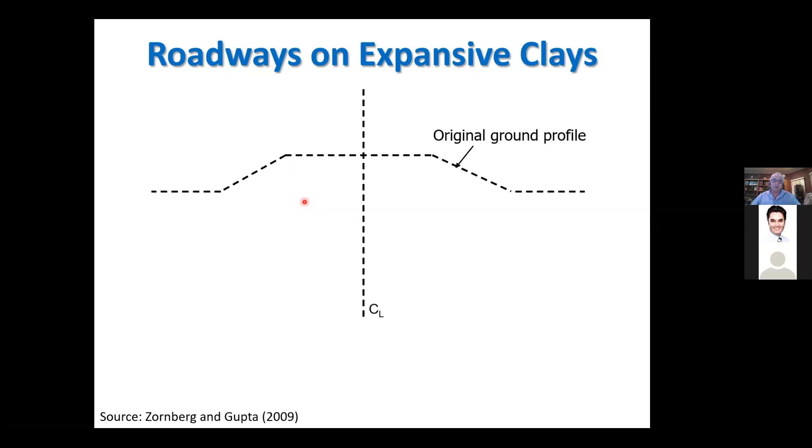Let's say we have a road founded on expansive clays. It turns out that expansive clays swell and shrink in response to changes in moisture. When the moisture content is high, the clay will swell; when low, the clay will shrink. The shoulders of the road change moisture very quickly or very often, while the center line of the road will not. Consequently, the shoulders will heave and settle, heave and settle. As a consequence, mainly during the dry season, at the end of the dry season, we start seeing something like this.

Very well-defined longitudinal cracks along the road. If you see this type of distress in the road, don't blame the traffic. If you see this type of distress, you can start thinking that potentially you, or the road, is sitting on expansive clays, and it can get really bad.

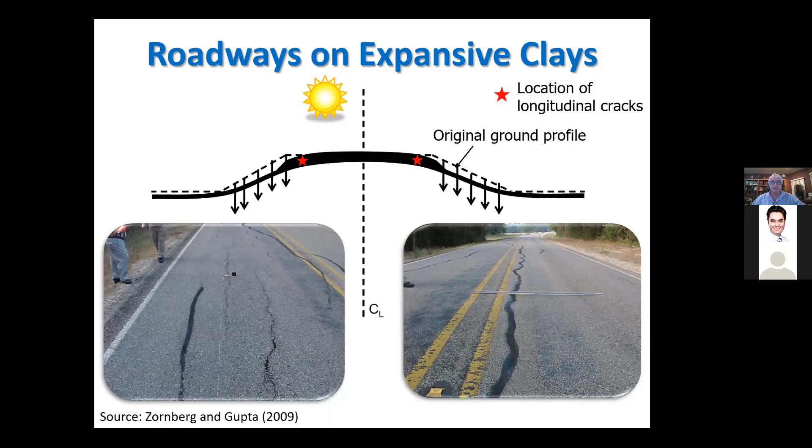This is a road nearby Austin, Texas, where I live. Sometimes we have this problem depending on the weather conditions, but sometimes we have this problem soon after opening the road to traffic. These are other examples in Central Texas - in this case in Austin, and in San Antonio, where we call them the Badlands. So this is definitely bad for roadways, and it's something that honestly we do not design for.

We design roads for traffic. We do not design these roads for environmental load. And this is not an exception - this is a very, very relevant problem. Let me show you some numbers. What you have here is some data only from the US.

We can consider that expansive clays and problems associated with them are some form of natural disaster, in the sense that they are caused by weather, typically extreme weather conditions. On a yearly basis, the cost associated with expansive clays exceeds 15 billion dollars per year. As a reference, here we have Andrew, Northridge - some of these, as a whole, the costs, and this comes from actual data from insurance companies. The financial costs associated with expansive clays far exceed the combined costs in the US of all other natural disasters. It is true that expansive clays are not life-threatening, but when we're talking about financial losses, these are actually huge.

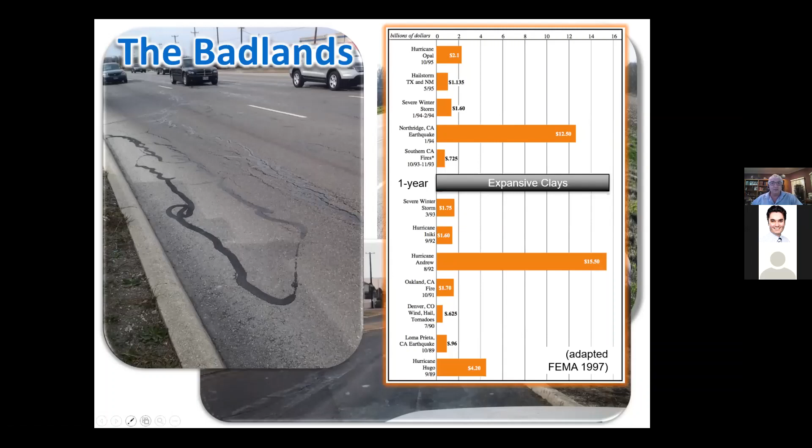Here we have where the problem associated with expansive clays is located geographically. Here in blue in the United States, central US, we have locations where there is a significant portion of expansive clays. And here in red are the locations where, okay, this is really bad stuff. Do not plan on building your cities in these red areas.

But that's not what we did in Texas. Let me show you Texas in detail. Here is what is called the Eagle Ford Formation, this red line here, and this is probably the most important north-south highway in the state. Here's Dallas-Fort Worth, this is Austin, Texas where I live, and this is San Antonio. 4 out of the 5 most populous cities in the state are exactly where we should have not built our cities.

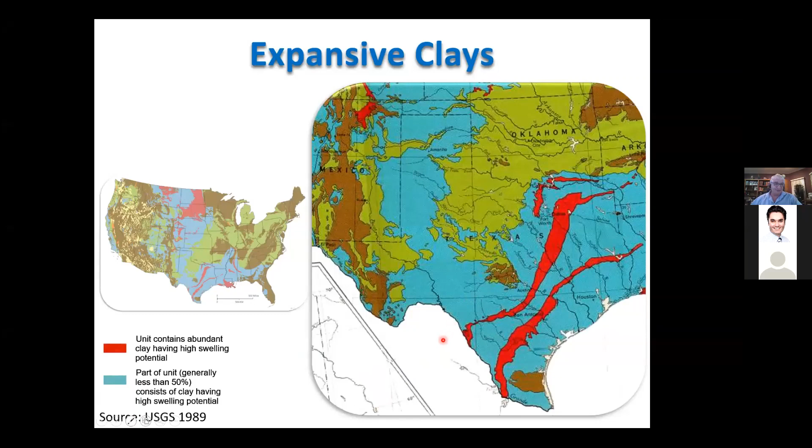To be very honest, as engineers we have not put together a firm solution to solve this problem until now. And I'll tell you why.

But before we get into that, let me try something with you. I want to know who you are. So go get your cell phone or a computer and go to www.menti.com, and a number will pop up. Plug in this number: 29 33 19 9.

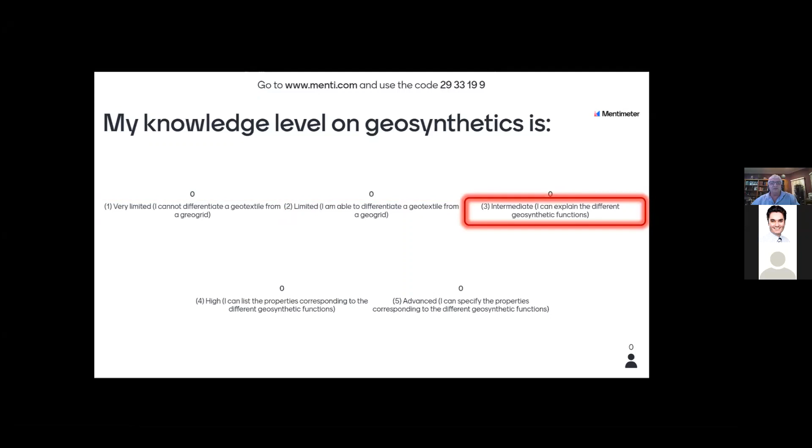I'm going to ask you the following question: my knowledge on geosynthetics is—I want to know where you are in the spectrum of geosynthetics, and it's perfectly fine if your knowledge is not high. If your knowledge is very limited, meaning you do not know how to differentiate a geogrid from a geotextile, that's perfectly fine. Limited means you know how to differentiate a geotextile from a geogrid, and that's it. Intermediate means you can explain the different functions of geosynthetics. High means you can list the different properties associated with the different functions of geosynthetics. And I'd call it advanced if your knowledge is such that you can write specifications about geosynthetics.

I'm playing with my computer, but it's doing something. Let me try something here. Maybe it's not going to work as well as I wanted. Give me one second.

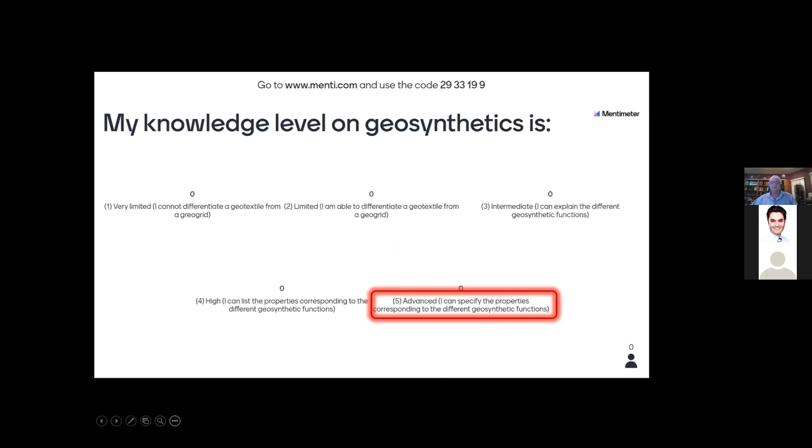There you go. Okay, so some of you are already telling me what you are thinking—intermediate, high, advanced. I'm going to give you 15 more seconds. Okay, everybody is an expert. Where are those of you that are not familiar with geosynthetics? Five more seconds.

High, advanced. Okay, a very well-educated audience. All right, so essentially 95%, or 85% of you are either highly educated or even advanced in your knowledge about geosynthetics.

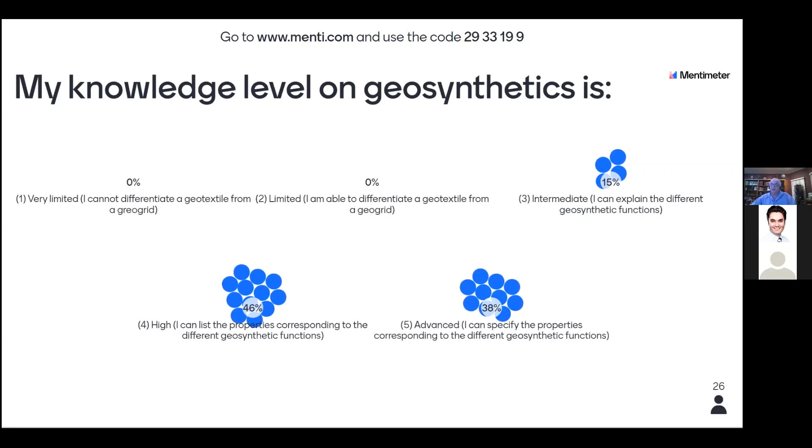So I have some good news for you. The good news is that in this presentation I am barely going to talk about geosynthetics—and not barely, I'm going to talk a little bit about geosynthetics. But essentially what I'm going to do is tell you from the geotechnical perspective what is the very significant geotechnical problem that geosynthetics will come to the rescue of. So what I'm going to walk you through is going to be a geotechnical tool.

I'm going to tell you what is a geotechnical centrifuge. Then I'm going to tell you about a geotechnical problem—we already started talking about expansive clays. Then I'm going to tell you how to characterize this geotechnical problem, because this has been a very important issue. It turns out this is a mega, multi-million-dollar problem, but very often we come up with solutions using tests as simple as the plasticity index of clays. Finally, I'm not going to talk that much about lime stabilization, which is one of the options, and I'm going to tell you about geosynthetic stabilization to solve the problem—not of traffic in roadways, but the problem associated with expansive clays. And let me give you a heads up: it does work.

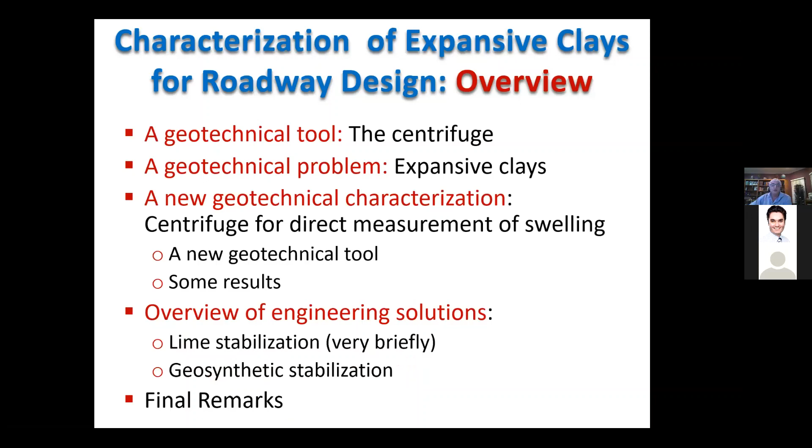All right, so let me tell you very briefly why and how I'm going to characterize expansive clays. This is a very important issue because, again, we know if clays are highly plastic or not plastic, but how big is the magnitude? What are the design criteria? What do we design for when we have expansive clays? Let me tell you about that.

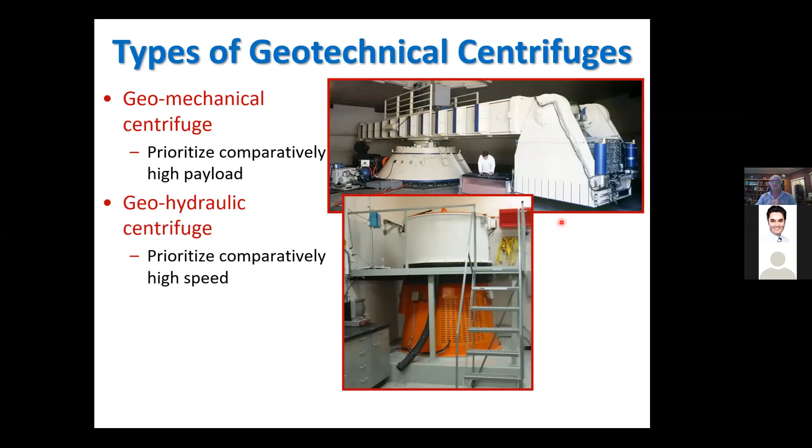Types of centrifuges—I'm going to be talking about centrifuges, and if you're familiar with geotechnical centrifuges, perhaps you're thinking about something like a big washer machine, where we increase the centripetal acceleration in a model so that the model has the state of stresses that corresponds to a prototype. That's not what we're going to be talking about. Instead, we're going to be talking about a geo-hydraulic centrifuge. This is a type of centrifuge we have in my lab at the University of Texas at Austin. Essentially, this is characterized by a comparatively high speed, 500 Gs—that's what we want, Gs meaning the acceleration of gravity.

Or even a geo-characterization centrifuge, a third type of centrifuge—these are my terms, my terminology. This is what I call it when the priority is something expeditious and practical, and it is for characterizing expansive clays. I'm going to tell you how.

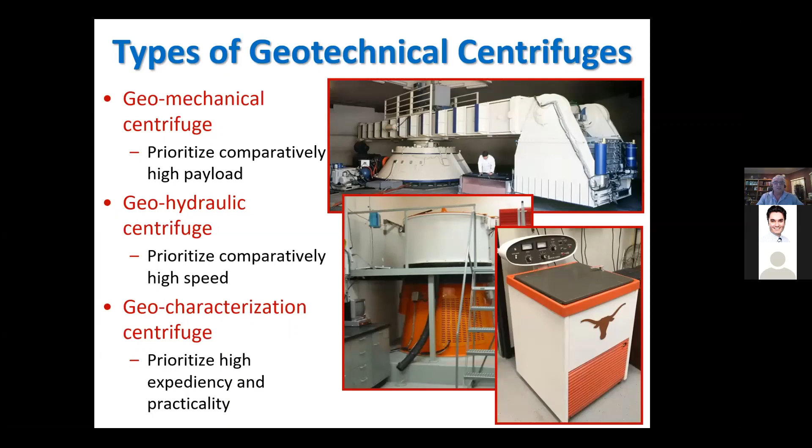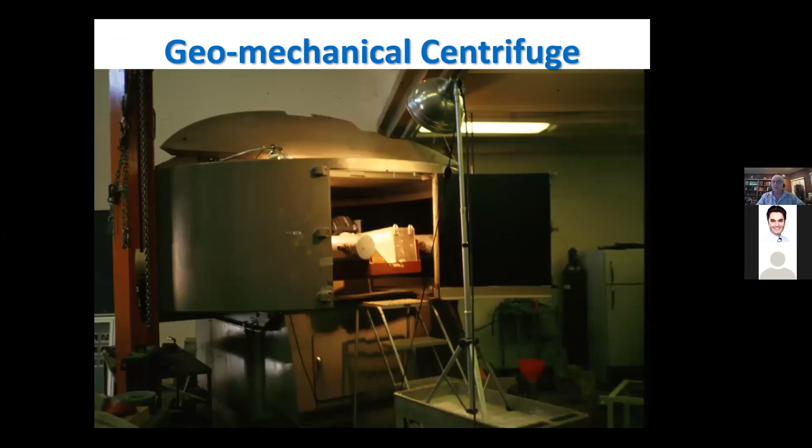So this is one geomechanical centrifuge. I did my PhD dissertation many years ago using this machine. At that time, I wanted to evaluate the behavior of reinforced soil slopes, and the goal was to analyze if they fail as we believe that they do, and at the time we concluded that they do fail as we believe.

And here we have a view of a reinforced, geotextile reinforced slope. The evaluation in this case was to evaluate whether the design methods that we have for geotextile reinforced soil slopes are consistent with how we design them. There are some good news in there, but that's not the point here.

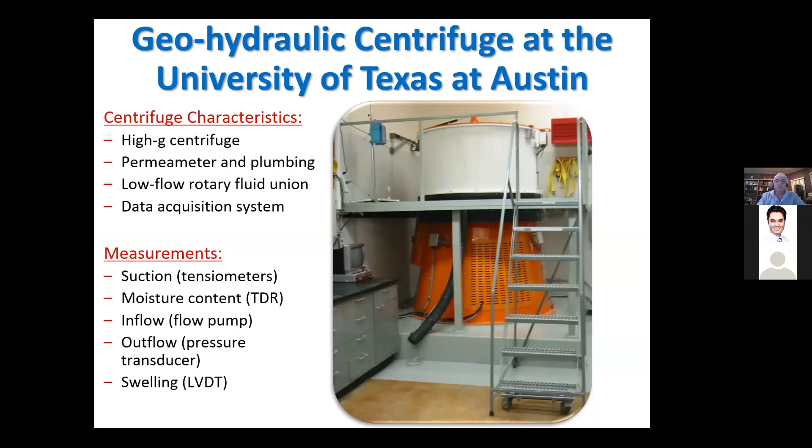The idea is that we are going to use a different type of centrifuge. And this is the type of centrifuge that we're going to be using. Again, why are we talking about centrifuges? Because we want to characterize expansive clays. Here is a high G centrifuge. It does have a permeameter inside the buckets.

So when we fly this centrifuge, we're going to have a soil sample in there, and we're going to have tons the opportunity to measure many things. Key terms - I know that you are an expert on geosynthetics, you may not be an expert on geotechnical engineering, and that's on purpose. But we can measure aspects such as suction and moisture content and influx and outflux and volumetric changes, the swelling of the clays. All right, so why do we want a centrifuge?

Let's say that we don't have a centrifuge. Let's say that we are interested in moisture advancing through this column. And this column is a column that corresponds to what we may call the active zone in a given soil layer. It turns out that the key in here, when we are evaluating expansive clays, I mentioned that this clay swells and shrinks in response to moisture changes.

So what we really need to analyze in here is the flow of moisture in the soil, but, and this is a big but, under unsaturated conditions. If you went to a classic geotechnical program, you may remember flow nets and saturated flow and Darcy's law. All that most likely was in relation to saturated flow. Here we're talking about flow of moisture under unsaturated conditions.

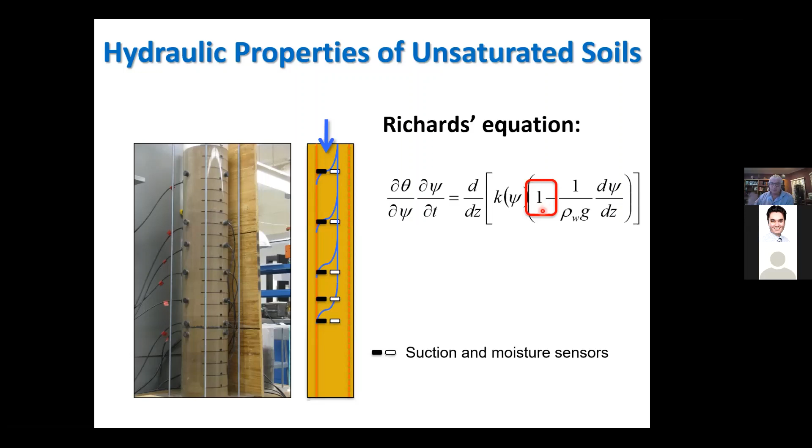Okay, so the parameters that we want, if we want to solve this problem, the parameters that we need to get are shown here. For a given soil, for each soil, we need 2 sets of functions. One gives me the moisture content versus suction. We call it here the soil water retention curve, SWRC.

What about the hydraulic conductivity function? Forget it. It's so complicated to get experimentally that we never get it. Why? Because it takes forever. So forget it, we're not going to get it. But how are we going to solve the problem? We are just going to guess.

But I've heard that there are finite element programs and different codes that do unsaturated flow. Yes, but they all have a wild guess on what the hydraulic conductivity function is. Can we solve this problem?

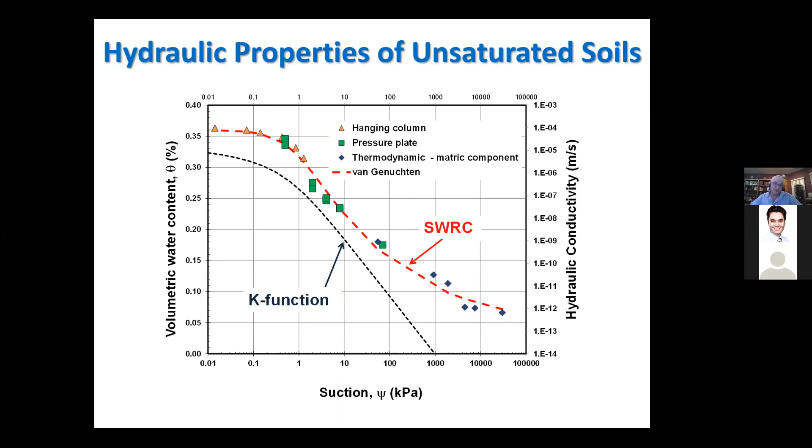Yes, one way of solving this problem is with the centrifuge. That's why I'm showing you the centrifuge. Because if we go back to the Richards equation, if you remember, this was the value when we were not in a centrifuge. Now, if we are in the centrifuge, trust me, this value here means the number of G levels, and we can put a very high number of G levels in a centrifuge.

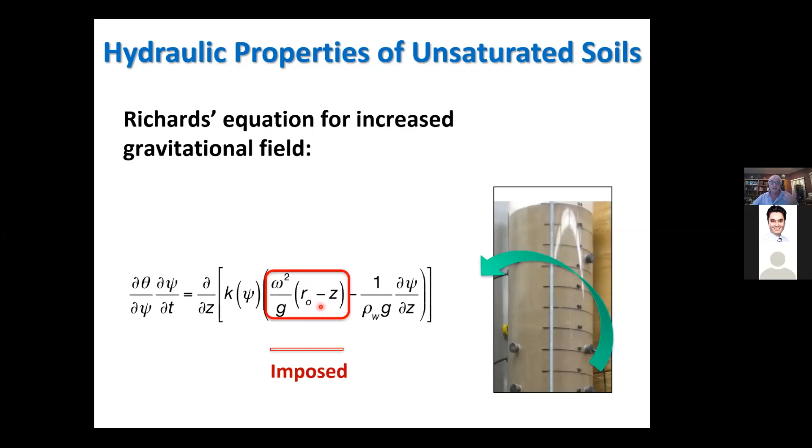The problem that would take us 4 or 5 months to reach steady state will, in this case, take us 1 day. So now that we can solve the problem, we can run the tests that it takes to get the hydraulic conductivity function. And this is how we can get it, all right?

So we can run these tests in a centrifuge. We reach a condition that is very easy to analyze, called the steady state condition. Eventually in this test we impose some variables, the influx, the rotational speed. We measure the gradient in suction, or in some cases we benefit because this gradient is 1, and eventually we get the number that we want, which is the hydraulic conductivity. So this is one way of getting the hydraulic conductivity function experimentally from the centrifuge.

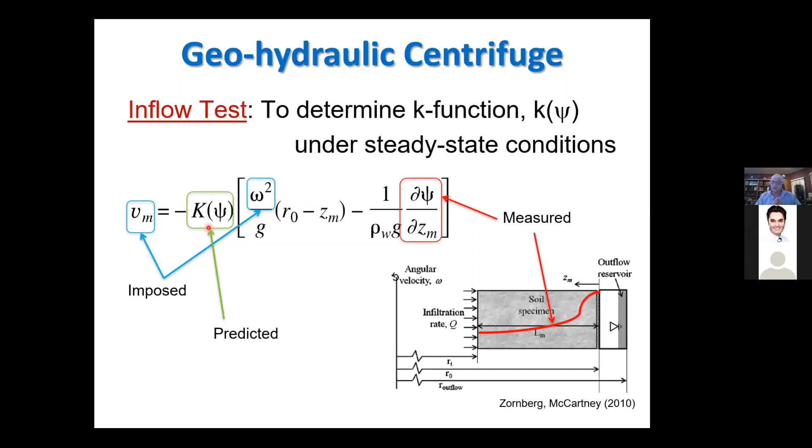This is an introduction to what we're going to use next: expansive clays. I told you all that because that knowledge about how to accelerate flow problems in soils under an increased gravitational field, we're going to use now to understand the swelling of clays, which is a flow problem in a very complicated soil called clay.

What makes a clay is that the particles are negatively charged, electrically charged. This is called isomorphous substitution. A clay is a clay because there is isomorphous substitution. Is it a clay because it's tiny? No. A clay is a clay because it has isomorphous substitution. What does this mean? It means that if we have an electrically neutral molecule of clay...

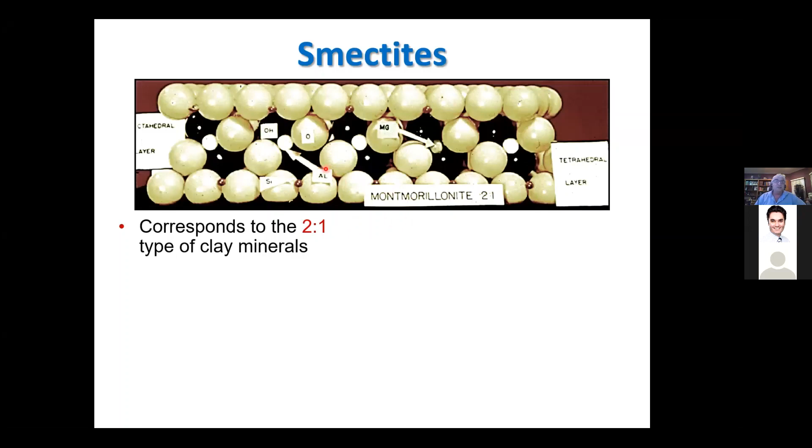This happens to be a clay, and it turns out that in a smectite, one of the nasty clays that we have in Texas and you have in Australia, when this is electrically neutral, it has a bunch of aluminum, and aluminum has a valence of 3. Over geologic time, this aluminum is kicked out. Kicked out by what? It's kicked out by magnesium.

And they are geometrically a little bit the same, that's why it's called isomorphous, same form, same shape. So the magnesium comes and kicks out an aluminum, and that's happening in the clays over time. But this magnesium has a valence of 2. So for every magnesium that replaces an aluminum, we decrease the electrical charge of the clay by 1.

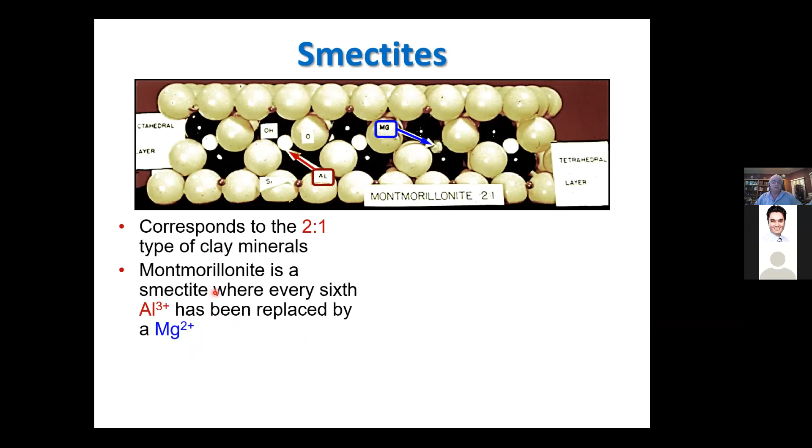If we do this, and one out of 6 aluminums is eventually kicked out, we have what is called montmorillonite, and we end up with a molecule that is negatively charged. And how does it satisfy that electronegativity?

Well, the way that the clays do it is by stealing the cations that are in the surrounding water. So if we have a smectite particle and here another smectite particle, the water has cations, and the clays steal those cations, bringing the water in, because they want to steal the cations.

And that's how water, if you put it on the clay, gets sucked in, because the clay wants all the cations that come with the water, and the clay will swell. If the water evaporates, it's very easy to come and go, to expand and contract.

So if the water is not available, that water is going to go away. You want the cations, but the clay is going to shrink because the water evaporates. That's why there is a lot of ease by which these volume changes can occur—not because we change the size or shape of the particles themselves, but because we change the size and shape of the interlayer, of the interparticle spaces.

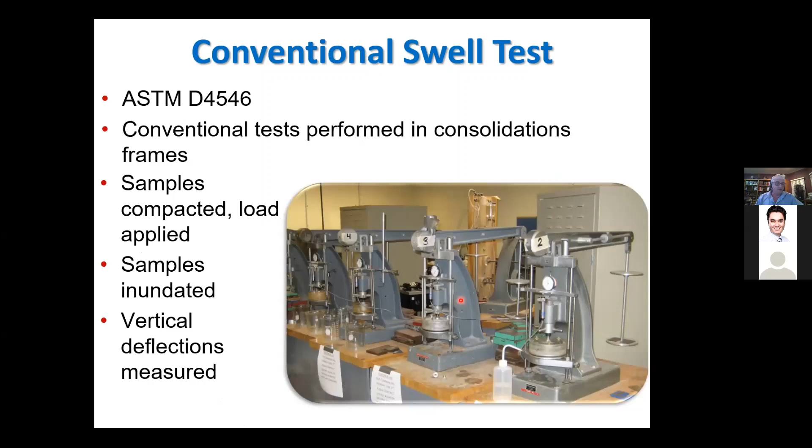Can we measure this? Yes, we can. We have some standard tests, but they take so long. The tests are similar to what you may have done when you studied consolidation, but it takes forever.

Here's one test on Eagle Ford clay, the clay I mentioned. Here we are 20 days into testing—vertical axis is swelling, horizontal axis is time—and it keeps going and going. One problem with this test is we never know when it's going to end.

So what's the outcome of this? We don't do them. In practice, we don't do swelling tests to quantify how much the clays will swell. In Australia, I'm pretty sure all you do is some plasticity index tests, and you make some multi-million-dollar decisions based on that, and that's it.

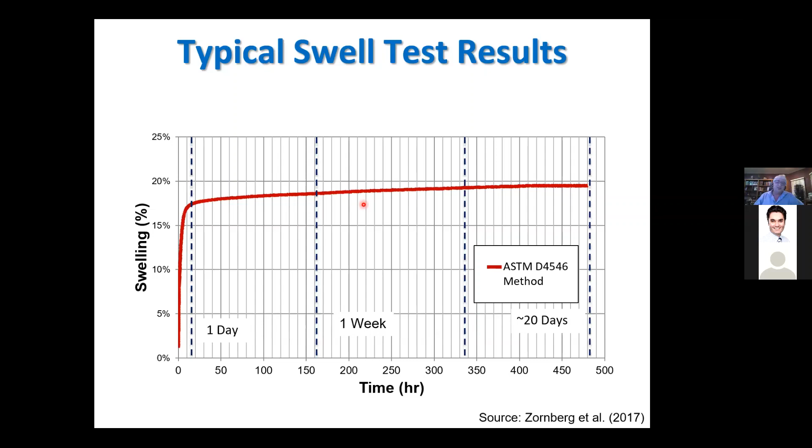And the other problem is that you do not need just one test, you need a battery of tests. You need tests to get what is called a swell-stress curve. When you tell me the swelling of a clay is 15%, or 20%, or 5%, it really doesn't mean much—you need to tell me how much it swells at a given confinement.

All right, so we talked about water moving into the soils, in and out—it's a complicated, slow process that we don't have a good handle on quantifying. Then we talked about the laboratory—we really could do it in the lab, but it takes so long that we don't do it.

And when we're going to design, what are we going to design for? Let me tell you what we do in Texas. I personally think this is a good approach, with some deficiencies. The Texas Department of Transportation, TxDOT, says the following: if you have expansive clays, or you're concerned about founding a structure on expansive clays, you need to determine what is called the potential vertical rise.

What is a potential vertical rise? Give me a soil profile and tell me how much the surface of this profile will swell if the clay goes from a reasonably low moisture content, as low as you can think it can get, to saturated. Is this ever going to happen? Probably not. But this is a wonderful index because it takes into account the relevant variables. It's not a prediction of how much it will swell, but an index that tells me how much my profile will heave if the soil goes from reasonably dry to saturation.

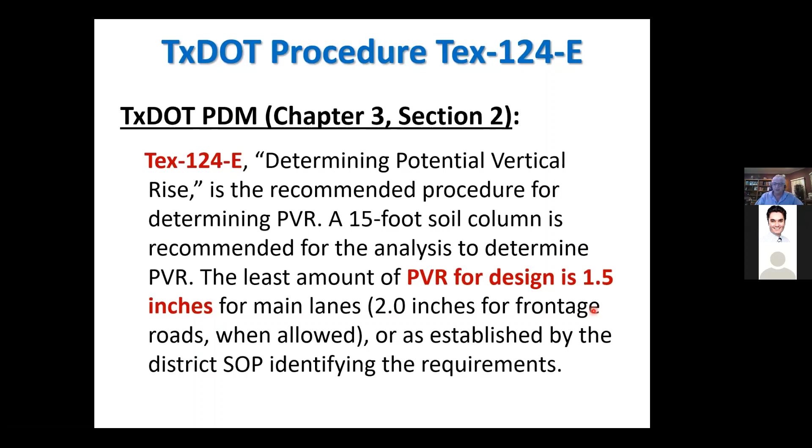This is a good criterion, in my opinion, a good approach, because it has very good practical implications. There's an outcome called the potential vertical rise, and it's easy to grasp by engineers. What is your PVR here? One inch. Oh, you're good. What is your PVR here? Seven inches. Oh, you're really bad. It's easy to grasp by engineers. It's a concept, a heave in the ground, and I'll show you a real heave. I'll show you, we can measure this. That is a good concept that is tangible by engineers.

Then it really accounts for the relevant variables. What are the relevant variables? The soil characteristics, the swelling of the clay at different confinements, the stratigraphy. If the stratigraphy changes, the PVR changes. The initial moisture content, that matters. The confining stresses, that matters. All those variables are taken into account when we calculate the potential vertical rise, the PVR.

But there are some minuses, some problems with the current implementation of the PVR. In TxDOT, in Texas, they came up with the right concept, but they arrived at this calculation using correlations because it's so complicated to measure swelling. They said, let's correlate swelling with things that we can measure more easily, such as plasticity index, such as grain size distribution. So the correlations needed to achieve that PVR are way too many.

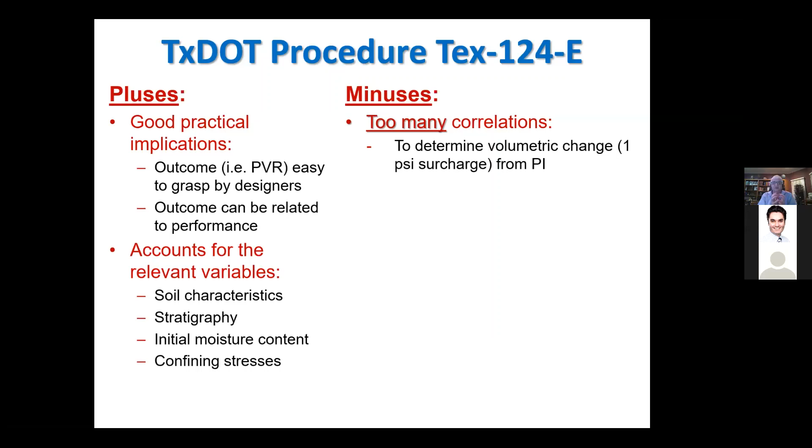There is a correlation to determine the volumetric change, just for a given confinement, using the plasticity index. There is another correlation that converts this into what is called the volumetric change. There is another that makes this linear, because it's a one-dimensional problem. Another correlation transforms it into a linear problem. Then there's another correlation that tells me what the swelling is for different confinements. Then another correlation that says, okay, I got it, but this is for the typical unit weight of my soil, and it changes if I use a different unit weight. Then they do it, but remove the coarse particles. So what happens if my soil has coarse particles?

Way too many correlations. And even worse, those correlations are too old. They started doing this in the 60s. They were happy at the time, and they kept using the same correlations they developed in the 60s. It's too little, too old.

And that's when the centrifuge comes about. So I'm going to put all this together. Let's characterize the swelling of the clays using a centrifuge methodology. We have a design criterion, which is the potential vertical rise. We have a technique that essentially helps me accelerate the infiltration of water into a clay. That's what we're going to do to characterize the swelling of clay.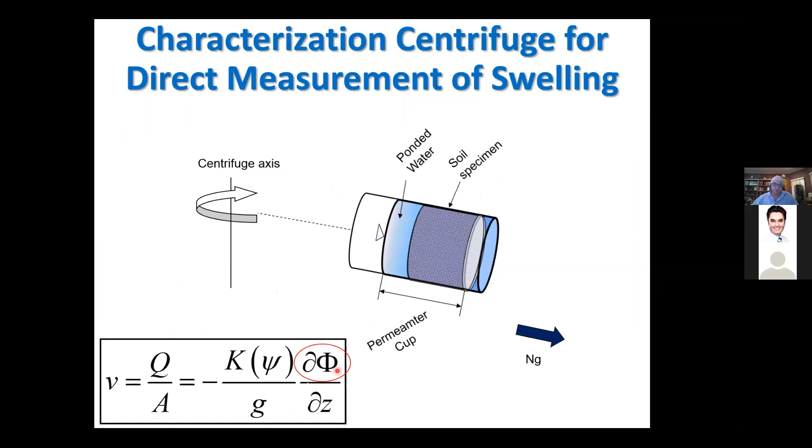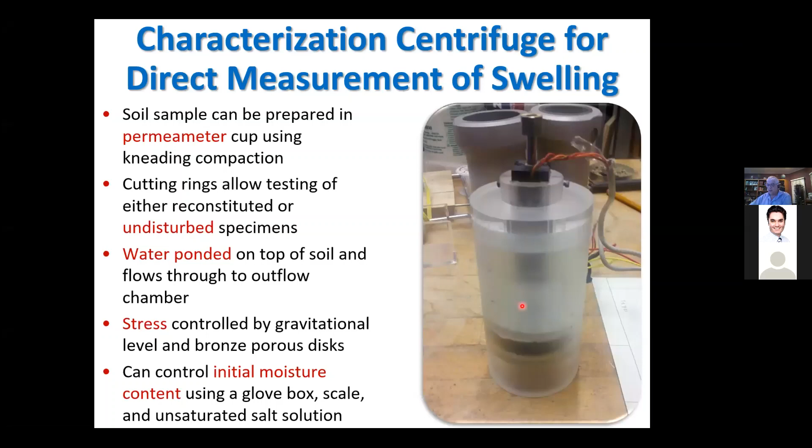So we get my soil sample, I spin it in a centrifuge, and the velocity in my sample increases because of the acceleration I'm imposing. It's reasonably small, can be a disturbed, reconstituted, or undisturbed specimen. I place it in my centrifuge. A big jump in our technology was when we were able to get this with an in-flight data acquisition system. And more than that, when we do a spin in the centrifuge, we don't do one test at a time, we do six specimens at a time. This is a centrifuge, it's a floor-mounted centrifuge, and the testing environment is like this. Here we have six specimens ready for testing.

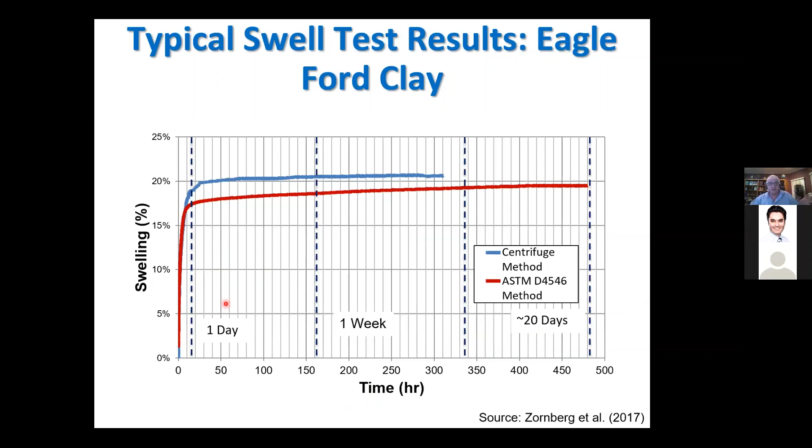And what is it that we're going to measure? The same thing that we measure in an oedometer test: the swell versus time. If this is the swell versus time that we obtain in a free swell test, in kind of an oedometer type of test, this is the same free swell versus time that we get in a centrifuge. While these took around 20 days and we were not done, in the centrifuge, after give or take a day, we're done with the final swell. Now this is not the end product. What we really want, each data point of this is one of those tests, what we want is the vertical strain versus confinement.

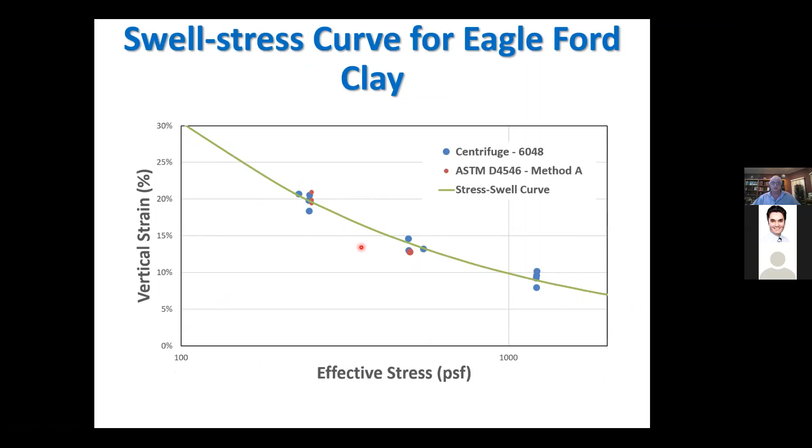And that's the curve that we need in order to calculate the potential vertical rise. What I showed here in blue are centrifuge tests. Remember, in one spin we get 6 data points. One spin, one centrifuge, we have 3 of them, so in principle, in one day, we could get 18 points. And these red points are the ones we get using the conventional swell test in an oedometer.

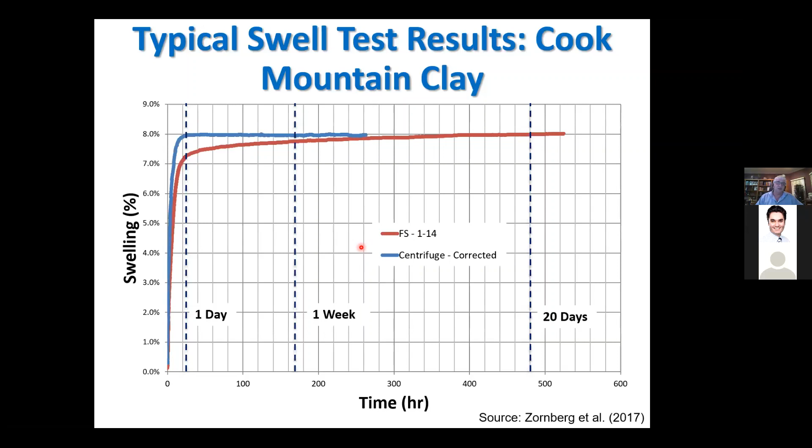So we convince ourselves that the technique we get gives us the opportunity to get this, the vertical strain versus effective stress. And with this, we can calculate the potential vertical rise.

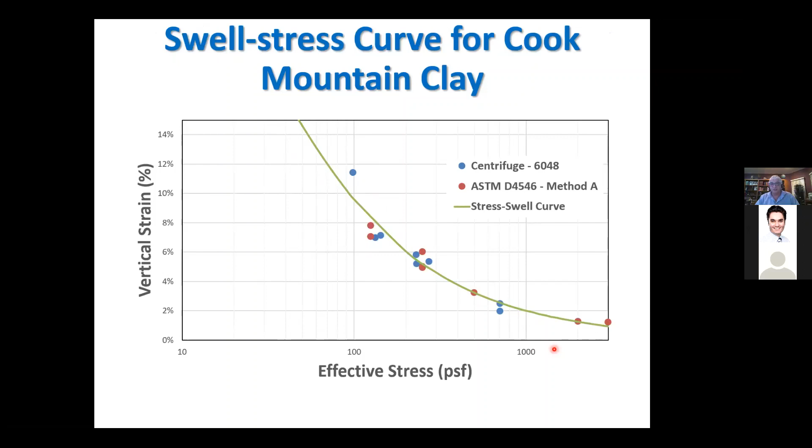So there are a number of benefits. Essentially, we have a testing procedure that is expeditious and highly repeatable. It generates the swell stress curves. It provides a direct measurement of the swelling of clays, which is something we typically have obtained through indirect correlations, most typically with a liquid limit or plasticity index of the clays. So now we can use this to calculate the potential vertical rise.

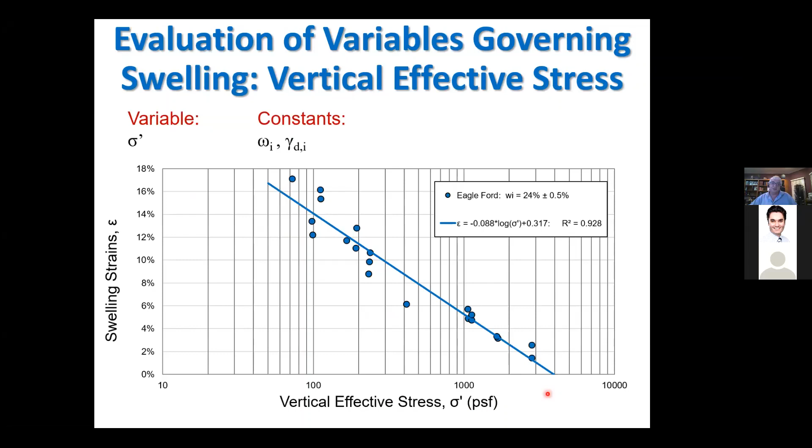How do we do this? Here's an example, a swell stress curve of one of the soils. This is another swell stress curve, actually correlations that in the past were so difficult to obtain. So here is the swelling versus vertical stress, which we call a swell stress curve.

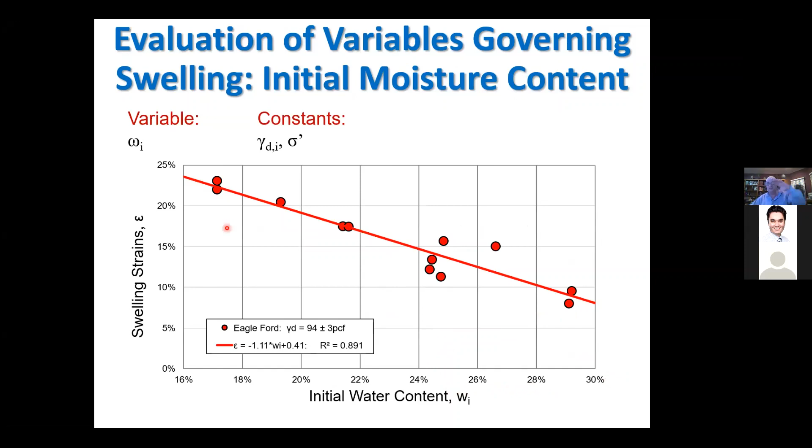This is another correlation for a given initial condition. We get how the swelling changes with initial moisture content. The higher the initial moisture content, the lower the swelling. This is another important aspect that we need to define.

And this is another correlation, the impact of the swelling of the clay versus, in this case, the initial dry unit weight of the soil, with different increases in dry unit weight. If the soil is denser, it makes sense that, everything else being equal, the clay will swell the most.

And now we're back to our problem, and now we know how to characterize our clay. So is this road gonna swell? Is this road gonna be distressed with the presence of expansive clays?

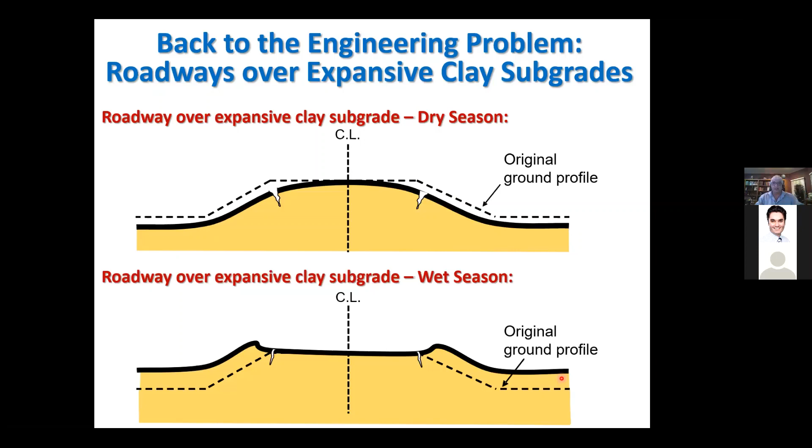Well, if we're in Texas, we would say, okay, and by the way, this has been implemented by the Department of Transportation in Texas. Essentially they will say, let me go ahead and measure the potential vertical rise. The mechanism is that the clay will settle, the shoulders will settle, and we will generate cracks along the road. Sometimes when the clay swells, those cracks will close. But once you generate the crack, even if it closes, the damage is already there because water can infiltrate through those cracks into the inner layers of the roadway.

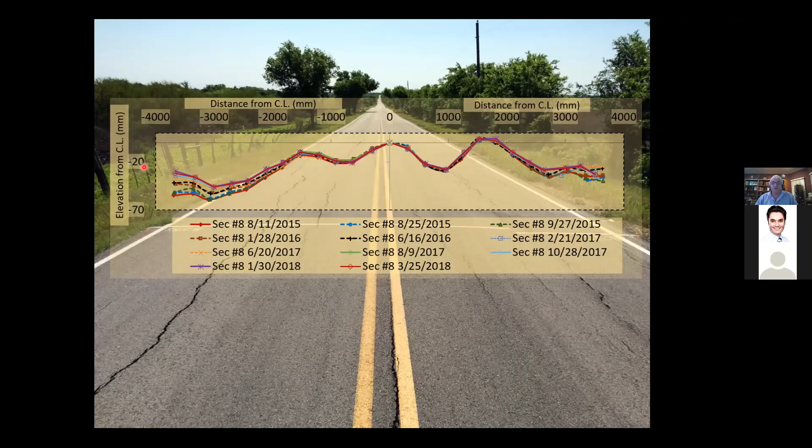And here is the same roadway I showed you before, nearby in Texas, and here we're measuring, in millimeters, the fluctuations, and this is not extreme conditions. Here we are measuring on the order of 20 centimeters, shy of 10 inches of vertical movement, and these are differential vertical movements from the center of the road to the edge of the road, in a one-lane road, 20 centimeters. This is the type of vertical movement we have in highly expansive clay.

So how do we do now? But now we can quantify. Do you have a problem here? Let's quantify the PVR.

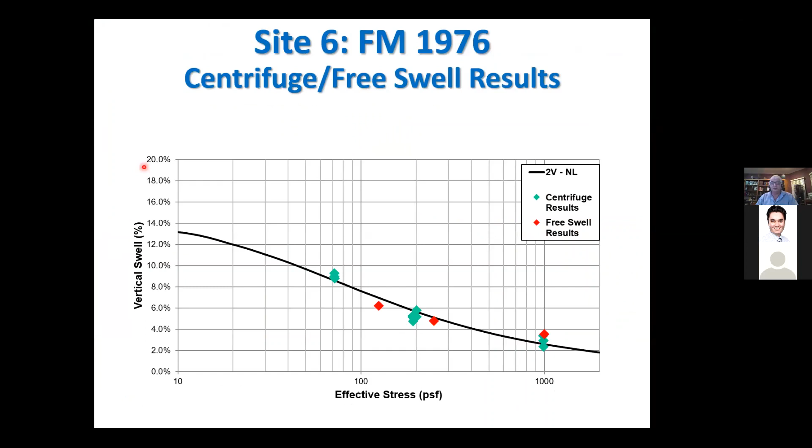So what do we do? We are going to run the centrifuge tests on the different profiles. We're going to go to the site, obtain the soil samples, get the swell stress curves, and characterize the PVR.

In this particular test, the PVR in this clay, using different methods of getting it, tells me it has a PVR of 3.8 inches. 3.8 inches is too much, more than what the Department of Transportation requires. You need to bring this down to 1.5 inches.

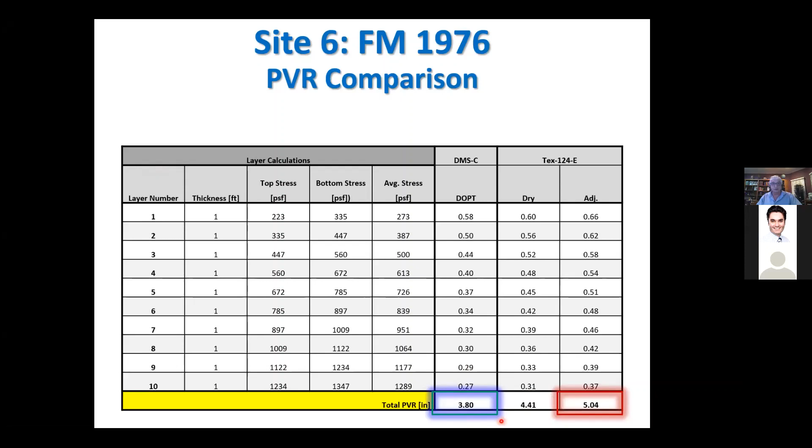How do we do this? Now is when we are going to try to solve this problem. So how do we do this? We have two ways of doing this. But again, let me get back to how we characterize the problem. First, the first part of this presentation, and it's the main part, is: do we have a problem? I do not know.

We need to characterize this. Roads are linear features, and along the road we may have locations where the problem is significant and locations where we do not have a problem. If we stabilize a section with a multi-million-dollar solution and we didn't have to, we're wasting our money. And if we don't stabilize it and we really have a problem, then our solution will not work. So the first step is to double check if we have a problem.

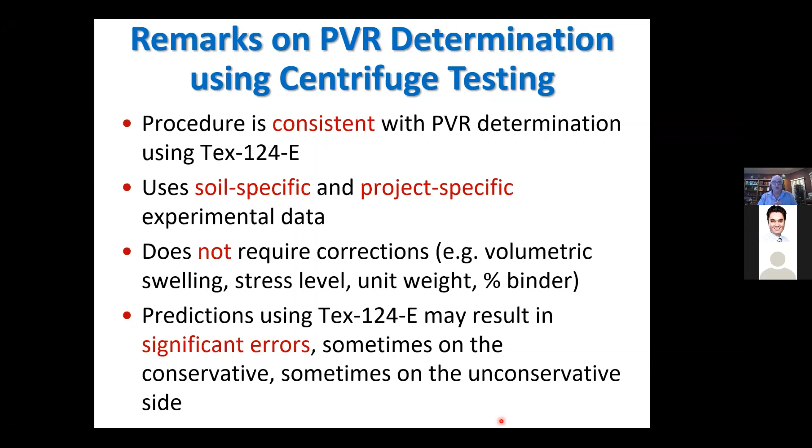What I've shown here is a reasonably recent approach that builds on years and decades of experience quantifying the swelling of clays, but now using an approach that is expeditious enough to allow you to build a database of data with which you can design.

That was if we have a problem. Let's say that we do have a problem. How do we solve it? There is a traditional solution and an innovative approach. The traditional solution, and I'm not going to spend too much time on this, is using lime stabilization. It has significant problems. More than that, it's too expensive. More than that, if you use this PVR approach, you will see that the typical approach, at least in Texas, before they did it rigorously, they could get 6 inches, 15 centimeters.

And they will say, okay, let's treat 15 centimeters and we're done. And it turns out that the PVR approach very often tells you, no, you need to treat at least half a meter or perhaps one meter to bring this PVR from 4 inches to 1.5. So the fact that you're treating it doesn't mean that you're solving the problem.

And the second approach is with geosynthetics. Let me briefly explain what we do with lime stabilization. It has many different benefits. One potential important problem is that it's highly heterogeneous. What makes this work or not work is not only if we kill the swelling, but if we kill the swelling uniformly. If we kill the swelling in this spot, but not at that spot, we could potentially make the problem worse because now we're creating a differential heave, and that's very, very bad.

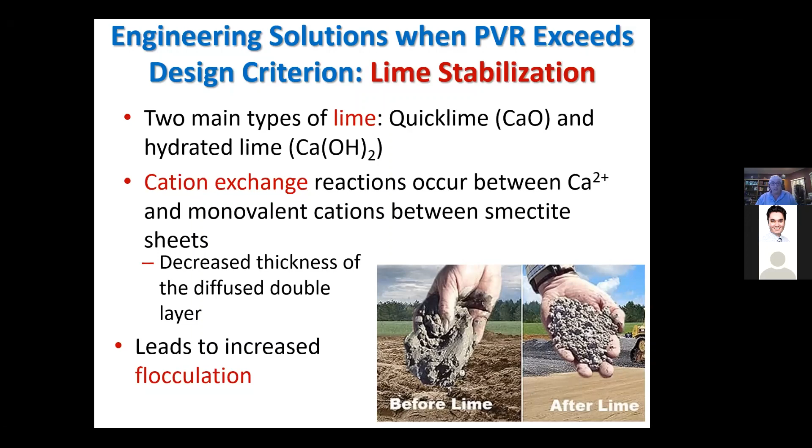And this is what they do in Texas. They really do not know what they're doing. So they say, okay, let's compact the soil to an optimum moisture content. Let's get the target relative compaction of 95%. Let's do what they call mellowing. They treat the clay outside, and then let it sit for some time. How long? I don't know. And then we place it, and let it cure for how long? We really don't know. And how do you define the dosage? Is it 1% or 2% or 5%? There are some rules of thumb based on the pH we can achieve, but this pH is mainly to avoid another problem associated with sulfates. It's not really to kill the swelling.

So I evaluated in detail the methodology for lime stabilization, and I can tell you, while experience matters, the experience doesn't necessarily translate. What we are doing in Texas, if it is just based on experience, doesn't necessarily translate to what may work here in Australia. So let me tell you about a new approach, which is using geosynthetics.

We don't have time, but in this case, I'm going to use geosynthetic stabilizations for roadways on expansive clays. Just to step back and summarize where we were, I told you about a bunch of geotechnical stuff, problems in roadways associated with expansive clays, and a technique that requires a very specific tool. It's not a very expensive tool, because even though centrifuges can be very huge, we're using very small centrifuges. But the entire trick is to measure swelling.

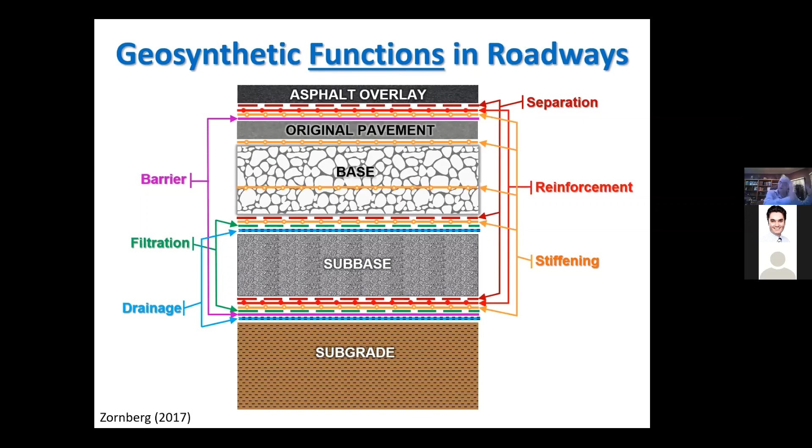The one that is very promising, from the hydraulic point of view, is drainage. But in this particular case, I'm going to get into one objective: to retard or eliminate these nasty longitudinal cracks by reducing volume changes due to expansive clays. The same problem also works in locations that are not Texas and not Australia, but have frost-susceptible subgrade soils. It's the same problem—it's volumetric changes.

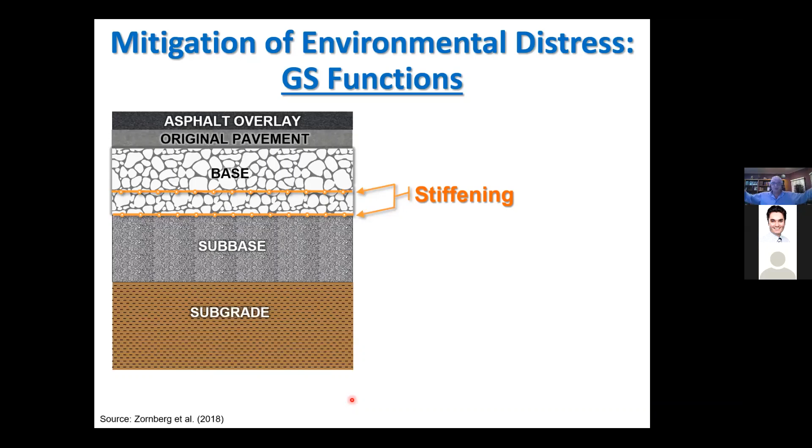So how is this going to work? We're going to use the concepts associated with stiffening of the base. Essentially, what we're asking the base to do is to remain an integral unit even with differential settlements. The cracks are triggered because we have a very high concentration of strain. The presence of the geosynthetic will distribute that strain. The volumetric changes will continue to occur, but the geosynthetic will distribute that strain over a wide area, and consequently the cracks will not be triggered.

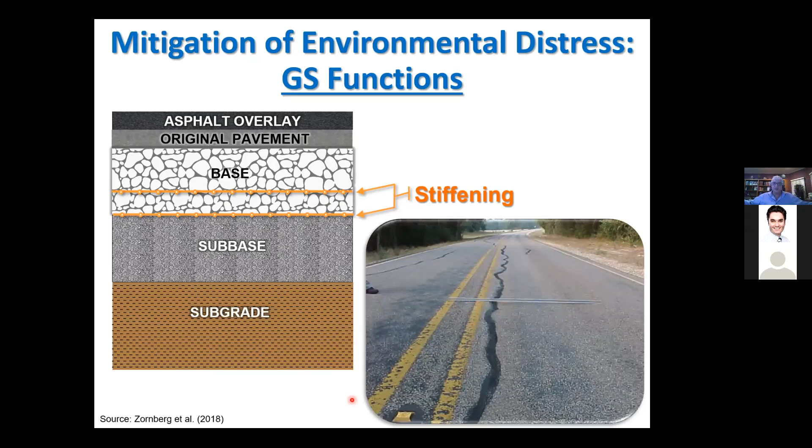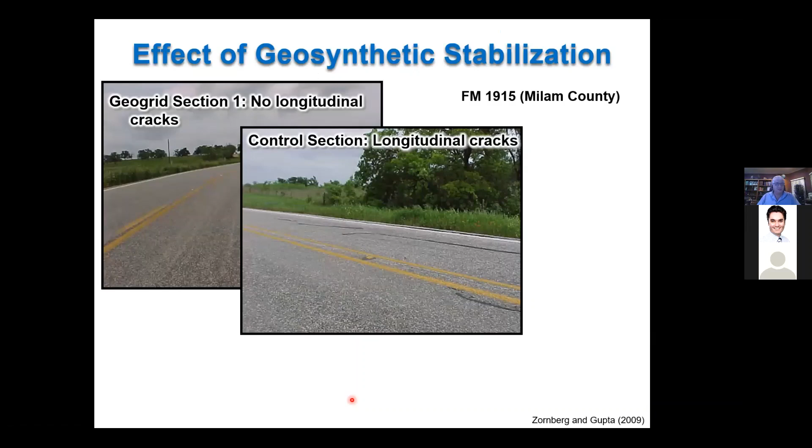Let me show you an example. Here's a geogrid section with no longitudinal cracks—they used geogrid in this case. Here's another test section: same road, same traffic, same weather conditions, give or take the same soils, but longitudinal cracks appear—one with, the other without geogrids. In the third section, not only with geogrids but with a reduced thickness of the base, there are no longitudinal cracks.

Based on this evidence, the Department of Transportation in Texas has been using these based on experience—they tried it, it worked, they kept using it. Only now are we bringing a design philosophy, a design criterion for it. So there is significant evidence that it works. Is it going to work always? No—what design criterion, that's what we're talking about.

Let me give you another example. This is a particularly important case study. What is striking is that we have 32 test sections, and this is a pair of them. The section on your left is a geosynthetic-stabilized section, with no longitudinal cracks. The section on your right is a control section. Everything else is the same: same soil, same traffic, same weather conditions, same drainage conditions. The difference is only the presence of a geosynthetic.

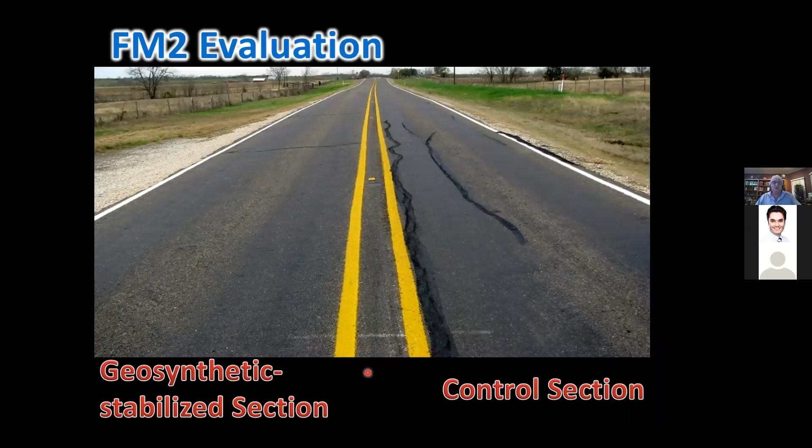Let me show you more—these are the results after 32 test sections. One way of quantifying this is by measuring the percentage of longitudinal cracks. 60% longitudinal cracks means that over the length of the road section, 60% of its length has at least one crack. It could be 200%, meaning there are 2 longitudinal cracks over the length of the section. This is the control, with no geosynthetics, and here are 1, 2, 3 different types of geosynthetics. It's not a surprise that they gave reasonably similar performance, but statistically there's no doubt—this is what we call type 1, the geosynthetics that are the least aggressive in order to solve the problem.

This is type 1, now we have type 2, and type 3. These are 3 different ranges of geosynthetics, essentially the same way that we have different geosynthetics for different problems on soil reinforcement in walls. We have different geosynthetics that address the problem of expansive clays: type 1, 2, and 3.

Bad news for the lime industry. Average lime, 64%. To be fair, the way that they do lime stabilization in TxDOT is not that they stabilize properly. I was telling you that if you're going to use lime stabilization, you need to design for it. In here, what they did is they stabilize the sub base and say, okay, I used lime, I'm done. Essentially, by stabilizing the base, the sub base, they may even make the problem worse.

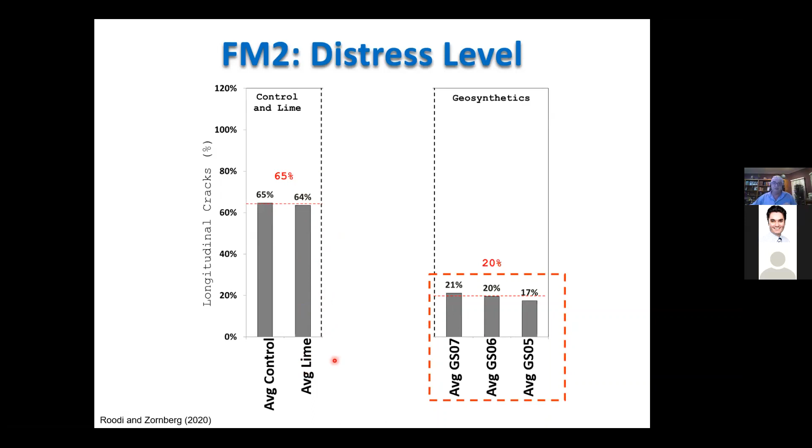Let me tell you why. Here's a different way of looking at the same data: vertical axis, percentage of cracks. It's a measure of the distress in the road versus time. Here is geosynthetic 1, geosynthetic 2, and geosynthetic 3.

Are these geosynthetics perfect? No, nothing is perfect. A good design of a road is a design that's designed for a given design life. The roads are designed to fail, but when? At the design life. A road that never fails is a bad design because it's an extremely expensive road.

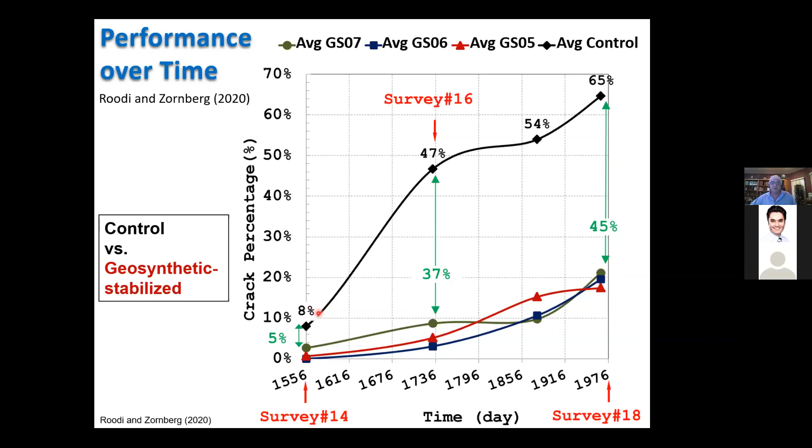The reason is that if you don't do the treatment and kill the swelling, essentially what you're doing is transforming, creating a little crust on your subgrade, on your subbase, and this is a brittle crust. So you're not only failing to kill the vertical swelling, but you're creating a brittle layer that may even trigger cracks that may not have happened otherwise.

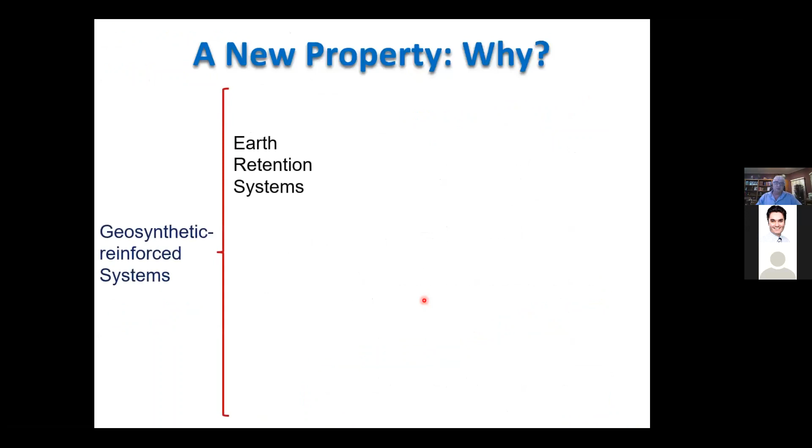What I'm telling you is we need a different property to solve this problem, and the property that we have evaluated is a measure of stiffness. I told you that the property we need is one that stiffens the base in a way that the base will remain stiff even under differential settlements.

This property is one that we have characterized at the University of Texas at Austin, and it's a mouthful: it's the confined stiffness of the soil-geosynthetic composite.

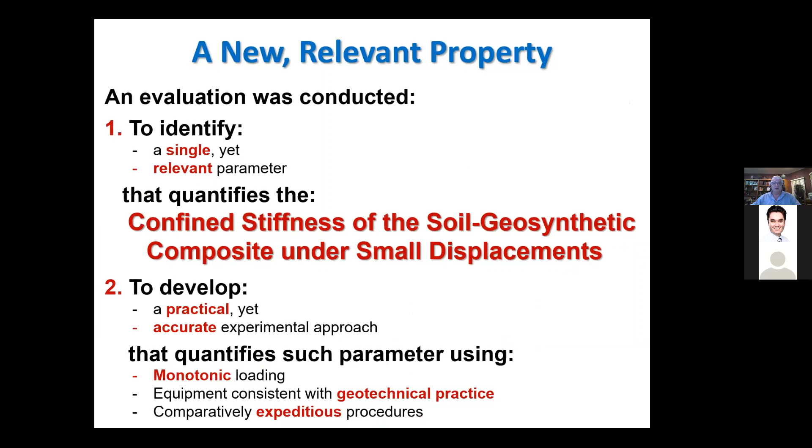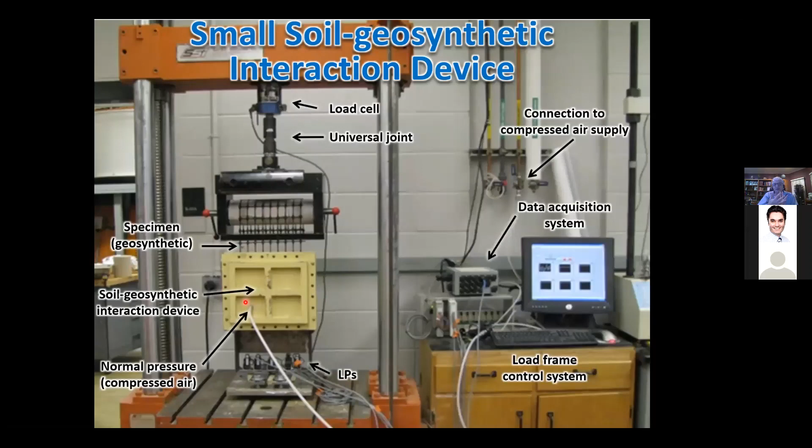I'm going to skip some slides and just tell you how to obtain it. The way to obtain it is using a device like this. Essentially it resembles a pull-out test, but it is not a pull-out test. It measures the stiffness of the interaction under the confinement of soil. This test has been specified in the draft testing procedure by the Department of Transportation.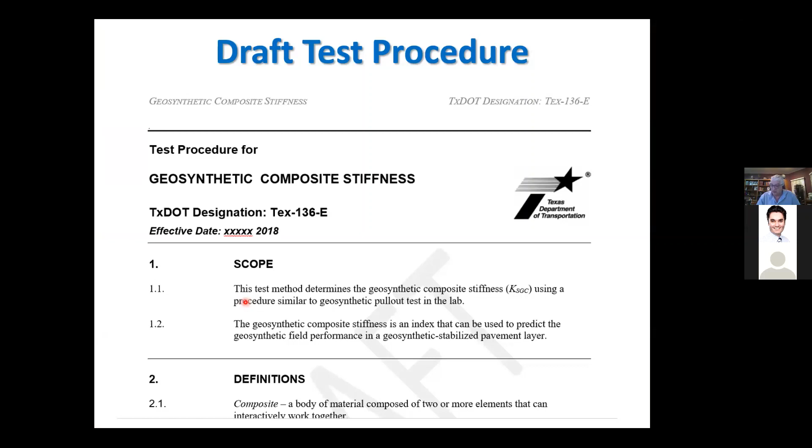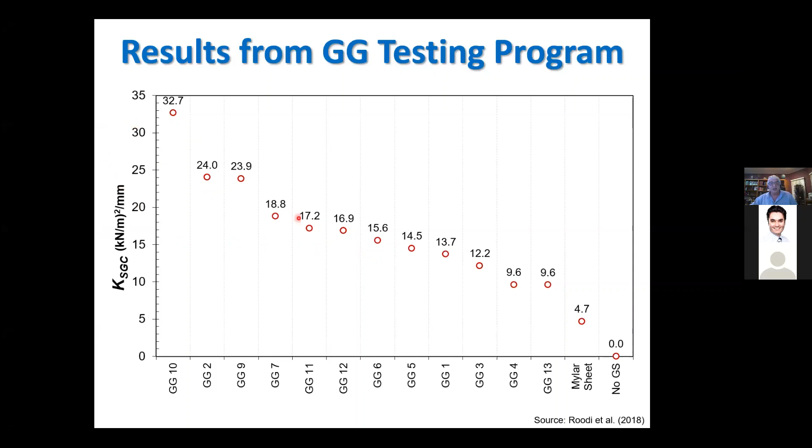But now that we have this stiffness measure for different products, we can go back to our case histories and measure how the different products will fare against different case studies. So essentially we can go to the case studies we've identified and, based on those, define a threshold that differentiates the sections that performed adequately versus those that did not.

So we have sections that we consider inadequate, and again, the measure here was the percentage of longitudinal cracks. So we have case studies that we did not consider adequate—some geosynthetics were there, but did not perform.

It turns out that, give or take, the specific KSGC—which is the name of the property—was below 10 for those that did not perform. Those with higher KSGC performed better and better. So not only can we differentiate those that work versus those that do not, but even within those that work, we can differentiate different levels of performance.

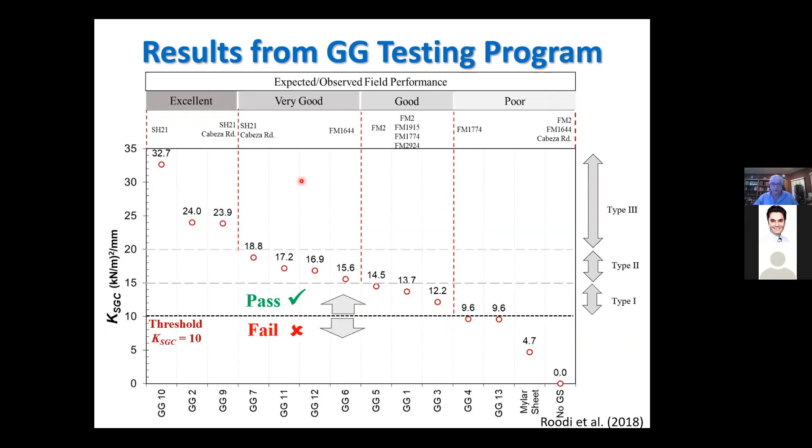That's why I'm telling you that now we can get geosynthetics of type 1, type 2, and type 3. One of the big problems of using geosynthetics in roadways is how to specify them. Honestly, because we're specifying based on properties we cannot put our fingers on, very often this is a previous specification from TxDOT based on things such as thickness, percentage open area, junction efficiency, and tensile modulus—properties that are dancing around the right thing, but are not really the properties that matter, that make a geosynthetic work versus not work.

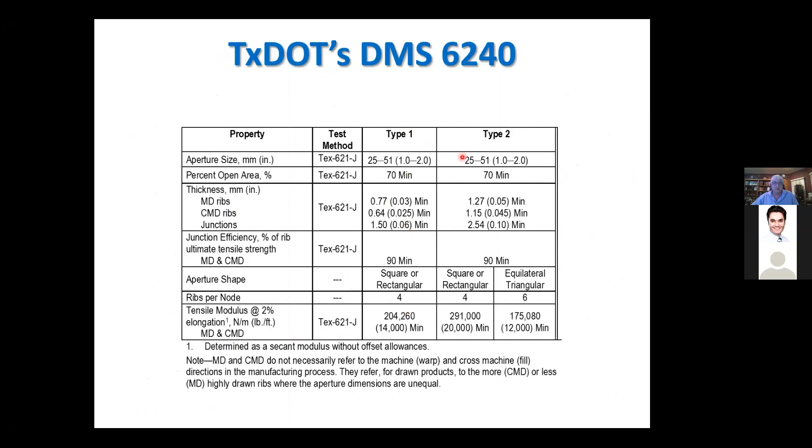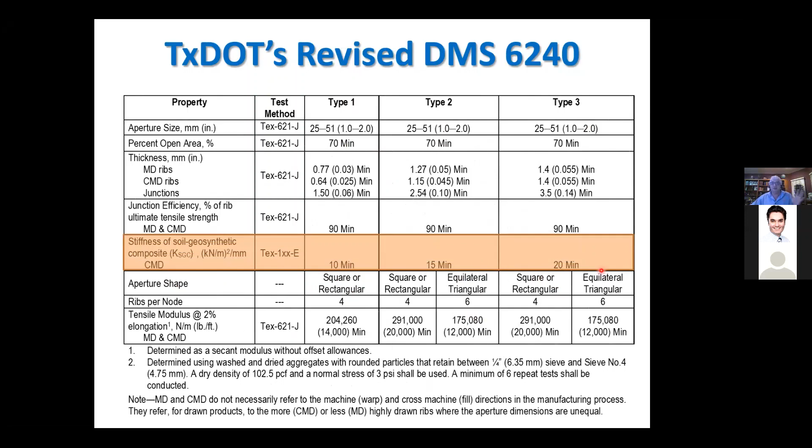Now we're going to have type 1, type 2, and type 3, but we have a new property, which is the KSGC. If the KSGC is less than 10, it's not acceptable. Type 1 is from 10 to 15. Type 2 is from 15 to 20. Type 3 is above 20. And here's a type 3.

All this information is publicly available. This is a report where you can get it, a publicly available report, FHWA, Texas Department of Transportation.

And with this, let me wrap up the topics we've discussed. In this presentation, we focused on how geosynthetics can work. But in order to explain why geosynthetics work, we need to understand the nature of the problem, what we are designing for. So in conclusion, I showed you some geotechnical aspects, and I know you are all experts, over 85% experts on geosynthetics.

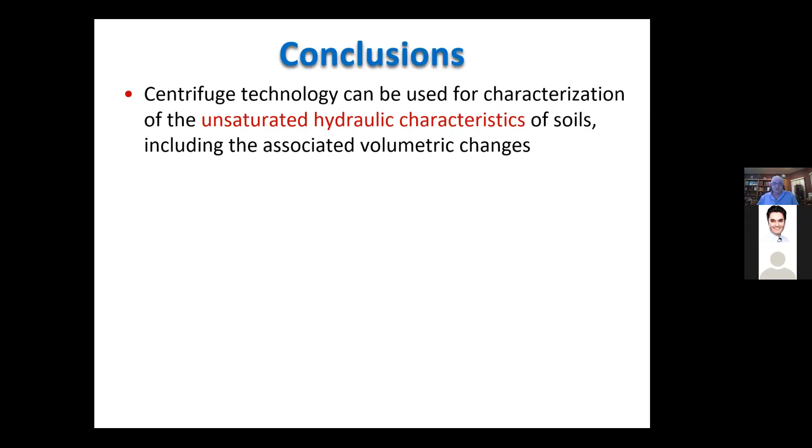So let me tell you something about geotechnical engineering. Centrifuge technology can be used to characterize unsaturated hydraulic characteristics of soils. Trust me, that's a very difficult task, made easy with a centrifuge. In particular, it can be used to obtain the swell-stress relationship, which we could have obtained if we had a year to spend in the lab, but now we can get it in a day.

While more practical and expeditious, the predicted swell-stress curves using the centrifuge are the same, so it has been validated against those long tests. The centrifuge produces the same swell-stress curve as those obtained through long approaches.

The centrifuge approach is particularly appropriate to predict what is called the PVR, the potential vertical rise. This is a practical design. I still call it an index, but it has a very important engineering meaning: how much the ground surface will swell, will heave, if the soil goes from a dry season to saturation.

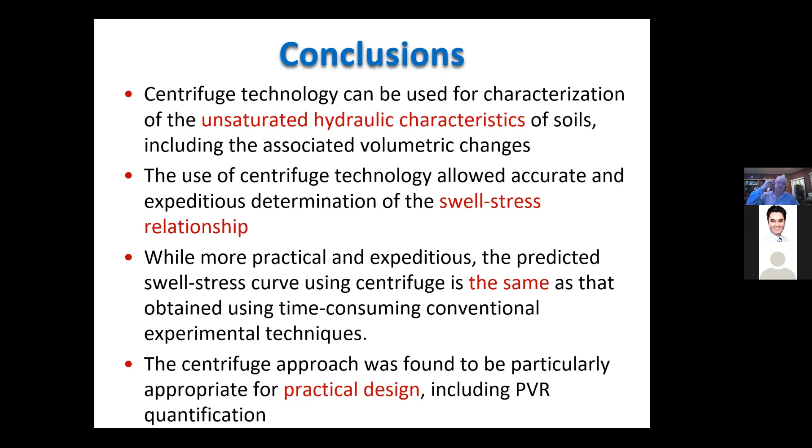Is this actually what is going to happen? No, typically it's going to go from a low moisture content to a high moisture content. So it's going to be shy of the heave that occurs if there is flooding and it reaches saturation. Okay, that's as far as the problem. So now we know how to characterize the problem. Now let's go to the solution.

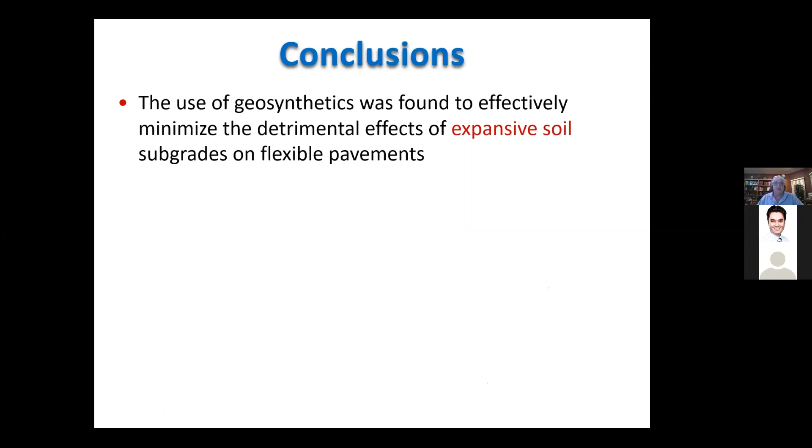Geosynthetics. The use of geosynthetics was found to effectively minimize the detrimental problems associated with expansive subgrade soils. There is plenty of evidence, quantified and correlated, and it is unambiguous that geosynthetic-stabilized roadways perform significantly better than those that are not geosynthetic stabilized.

One property we could use for design or specification — in this case we didn't go over design, we went over specifications on what works — is the confined stiffness of the soil-geosynthetic composite. And it turns out that this property correlates extremely well with a measure of performance distress associated with the presence of expansive clays.

And with this, I have walked you, my dear Australian geosynthetic audience, through some very important geotechnical aspects, to tell you in the end that geosynthetics do work, and work very well. And I thank you for your attention.

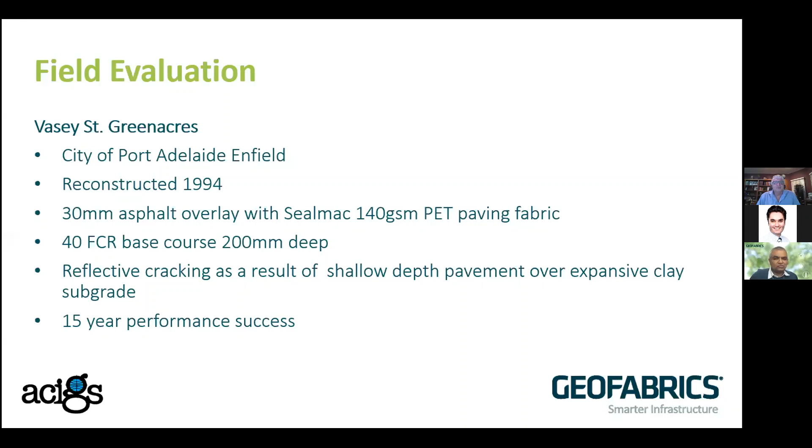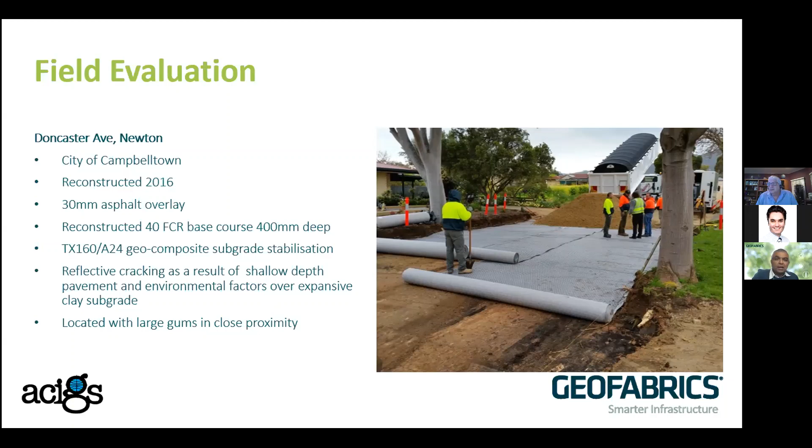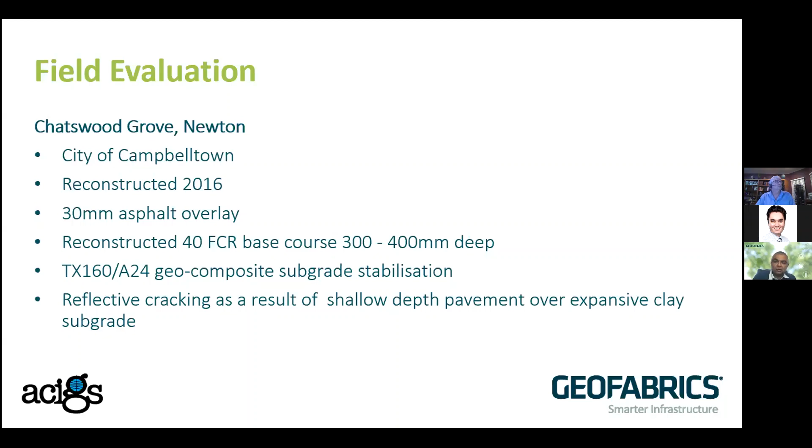My third case study is a nearly similar application, City of Campbelltown, the Chatswood Grove application, reconstructed in 2016. A similar construction sequence utilizing a multi-axial geocomposite at subgrade stabilization, with the main target of controlling reflective cracking as a result of shallow depth over the expansive clay subgrade.

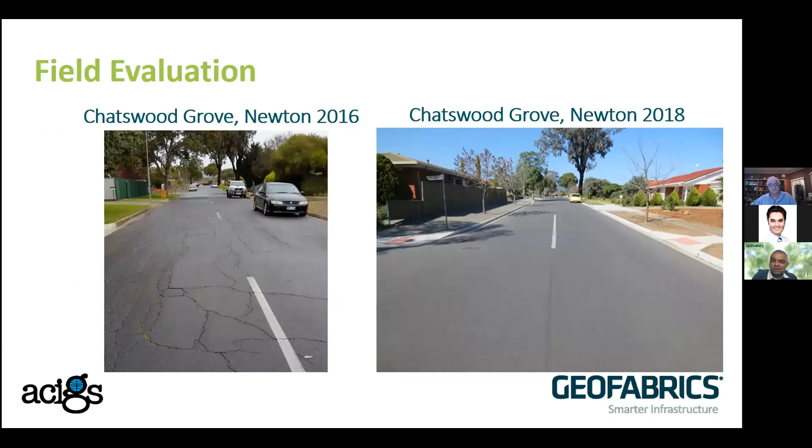As the Professor mentioned, I'm not going to go into details of what he presented, and I think he summarized very well the use of different types of geosynthetics in these applications. Use of geosynthetics in these types of applications will optimize your pavement support as well as performance, and is very effective in controlling longitudinal cracking.

These trials we've done in the Adelaide area show proof of crack mitigation. As the Professor mentions, geosynthetic solutions might be a cost-effective solution compared to lime, cement, or chemical stabilizations. The Professor also talks about the stiffness of the granular fill, that instead of focusing on the strength or mechanical properties of the geogrids, it's how the granular fill reacts with geosynthetic materials and how it improves the stiffness of the pavement layer to mitigate cracks.

We're also focusing on very innovative applications, utilizing conductive geosynthetics to gather stress information. We introduced a conductive geotextile, which may give us more information, more technologies and solutions that can be offered in these particular areas.

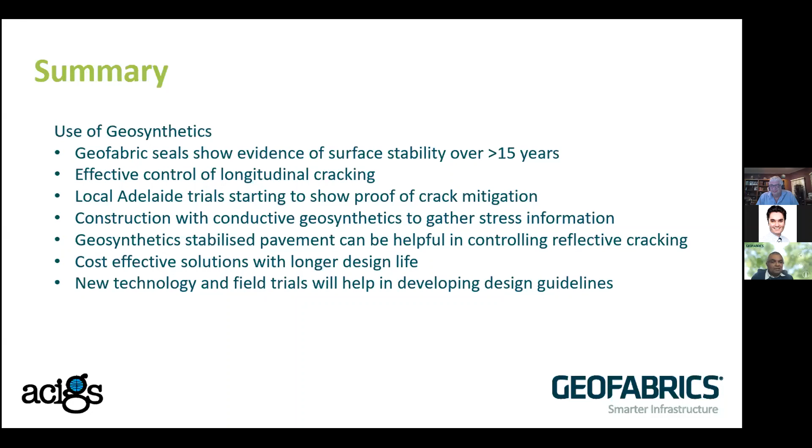As the Professor mentioned, I'm just re-messaging his wording, stating that geosynthetic stabilized pavement can be helpful in controlling reflective cracking. Cost-effective solutions are available with a longer design life by utilizing geosynthetic materials, and new technologies and field trials will help in developing design guidelines. Thanks for my short and sweet presentation. Thanks ACIGS for giving us an opportunity to present these initial innovative case studies for you. Thank you.

Thanks, Rajesh. So we went a little bit over time in total, maybe a couple of minutes over. But I'd really like to ask at least one or two questions because I can see the number and people are still staying around.

So, a question for Jorge. The question is about centrifuge tests giving generally higher values for swell compared to the normal ASTM D4546 method. Actually, no, do you think this is right, or no?

Let me tell you what I showed you. I short-circuited some examples. Essentially, the results we get from the centrifuge tests are on the spot with what we obtain for ASTM D4546, which is the swelling test. Now the main difference is the time it takes. But let me tell you, maybe this is the reason why the question comes.

The example that I presented shows two comparisons: one with the centrifuge approach, and the other is not D4546, it's the TxDOT approach. The TxDOT approach established correlations of plasticity index with ASTM D4546.